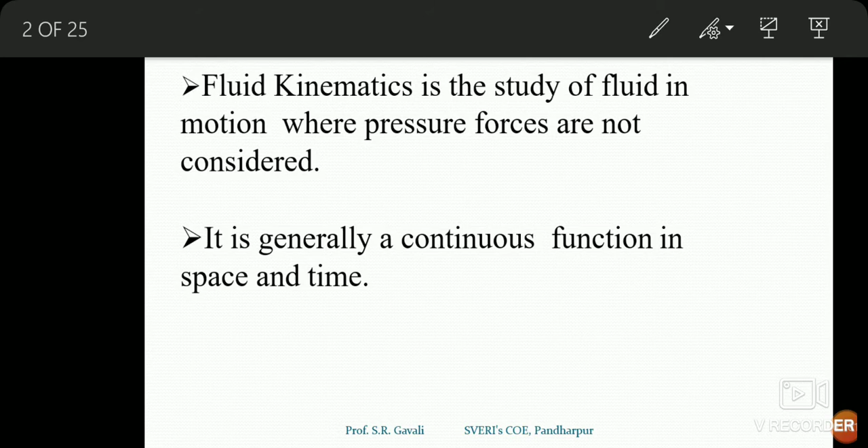To describe the methods of fluid flow, there are two types of methods: one is the Lagrangian method and one is the Eulerian method. These two methods are described by the fluid particle motion. In this method we analyze the fluid flow and find the changes in terms of velocity and acceleration of the fluid flow.

The first method is the Lagrangian method. The scientist Lagrange described this method, hence the name Lagrangian method. In this method, a single fluid particle is considered and its motion is analyzed. In the Eulerian method, one point is selected, and how the fluid flow is flowing at that point is analyzed.

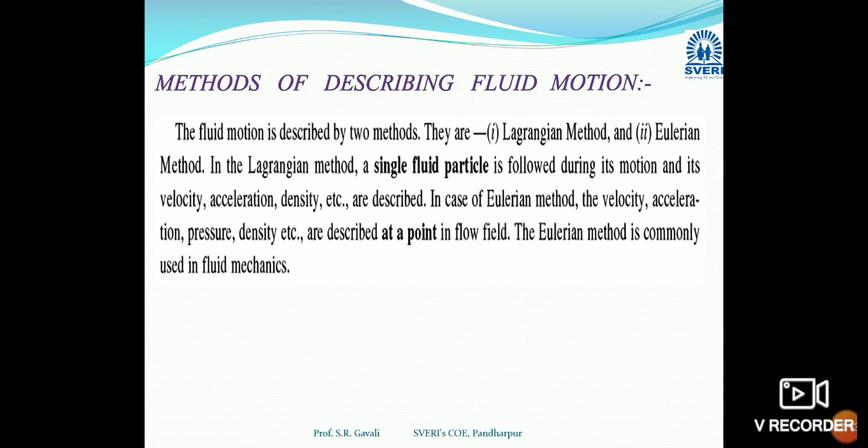So the first method is the Lagrangian method. This method defines mass, velocity, acceleration, pressure, all properties of fluid as a function of time. We consider one single fluid particle and track its motion.

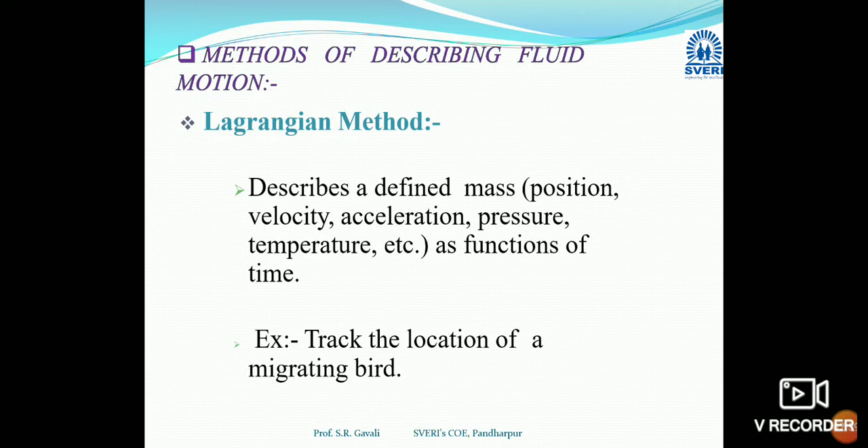For example, if birds are migrating from one place to another, their analysis requires tracking the motion of a single bird - calculating its velocity, speed, and acceleration change. How one bird migrates from one place to another - that is nothing but the Lagrangian method.

Another method is the Eulerian method, which describes the fluid flow. Here velocity, acceleration, pressure, temperature are properties of not only time but also of space. In the Lagrangian method, they are properties that are functions of only time.

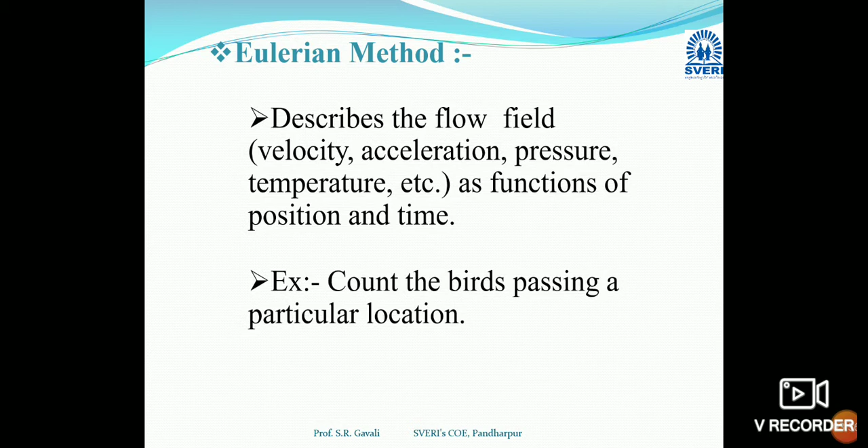If a crowd of birds is flowing, counting the birds passing through one particular point or space - how much of the bird group is flowing - that is the Eulerian method. In the Lagrangian method, the observer has to move with the particle, but in the Eulerian method, the observer stays at one particular point and analyzes the fluid flow.

In fluid flow motion, since in kinematics we describe only velocity and acceleration, an important part is the types of fluid flow according to the change in velocity or the type of velocity. There are many types of fluid flow.

I will highlight them: first is steady and unsteady flow, then uniform and non-uniform flow, laminar and turbulent flow, compressible and incompressible flow, rotational and irrotational flow, and one dimensional, two dimensional, and three dimensional flow.

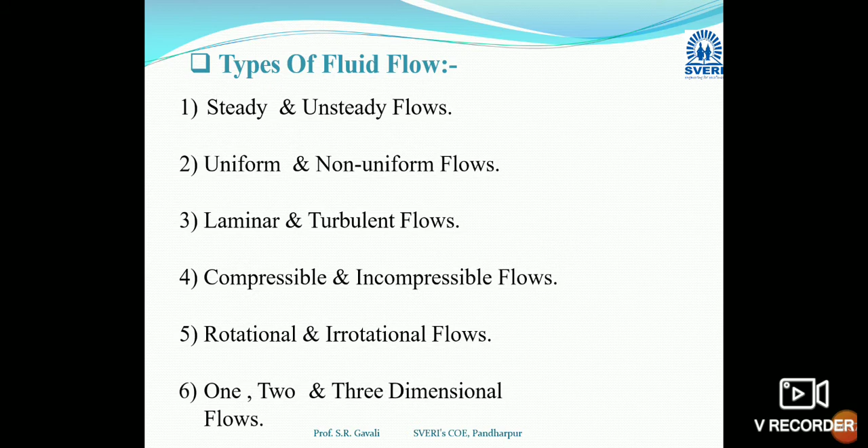Now we'll discuss these types of flows one by one. Steady flow is that kind of flow where the fluid characteristics like velocity, pressure, density, etc. do not change with respect to time - they remain constant with respect to time. This kind of flow is called steady flow.

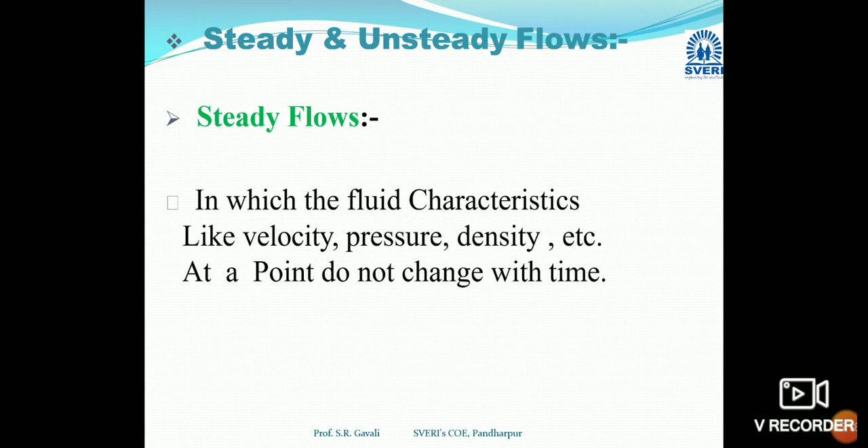For example, if we take the discharge from a tank whose water level is kept constant, every time we get the same discharge - that is called steady flow.

Then there's unsteady flow, where fluid properties like velocity, pressure, density do change with respect to time - they are not remaining constant. For example, if we take the discharge of water through a tank whose level is not maintained constant, as the head goes on decreasing, the level goes on decreasing, and the discharge automatically decreases.

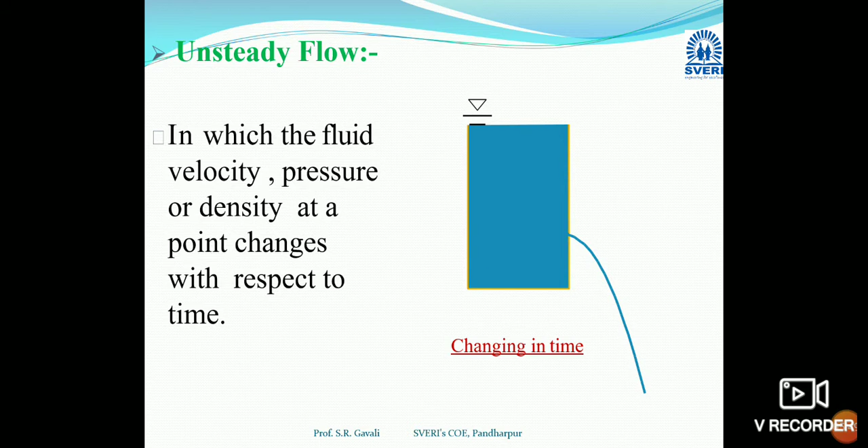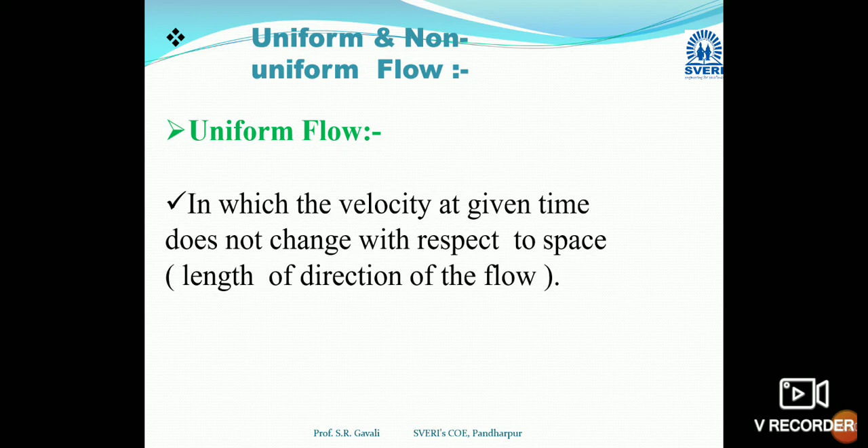Then uniform and non-uniform flow. Uniform flow is a function of space, in which the velocity at a given time does not change with respect to space, length, and direction of flow. So for every point in the fluid flow, the velocity is remaining constant, it does not change with respect to space at a given instant of time. That type of flow is called uniform flow. For example, the flow of fluid in a uniform diameter pipe is an example of uniform flow.

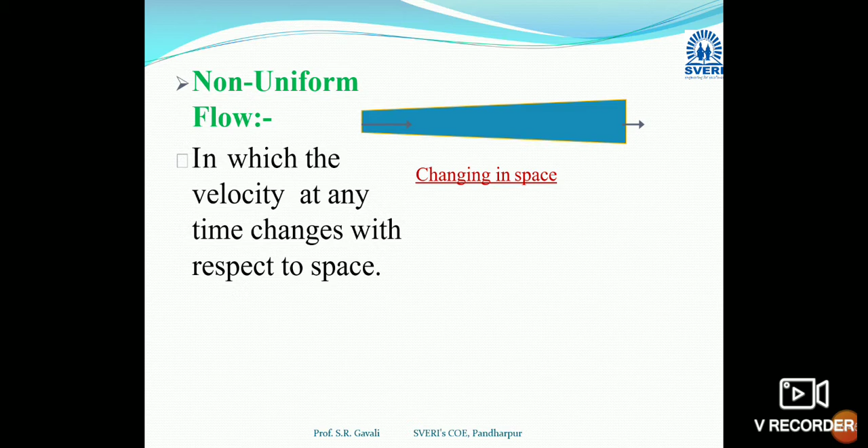Then non-uniform flow, opposite to uniform flow, in which the fluid velocity changes with respect to space at a given time. Here a non-uniform tapered pipe is shown. This pipe is tapered, so this is an example of non-uniform flow. Flow of water or fluid in a non-uniform pipe is an example of non-uniform flow.

Then another important type is laminar flow and turbulent flow. Laminar flow is the flow in which the fluid particles move in a streamlined manner, parallel to each other. These fluid particle layers will not cross with each other, and the velocity of laminar flow is always very low, so laminar flow occurs at very low velocity.

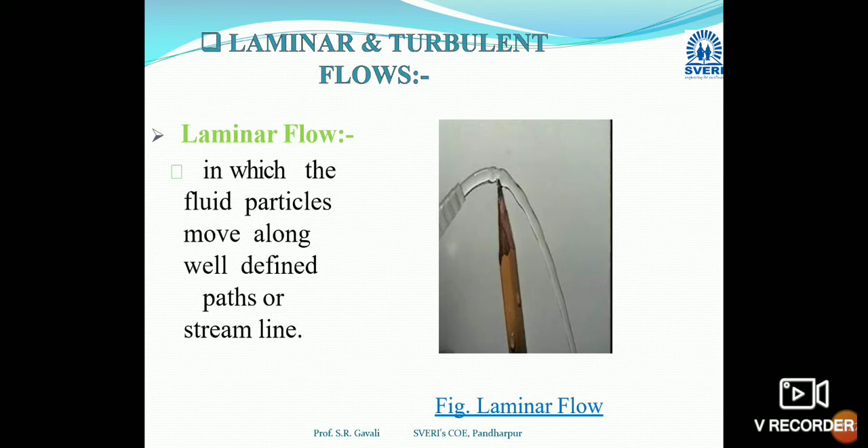Then turbulent flow, in this type of flow the fluid particles move randomly and are not in a streamlined manner. The fluid particles mix with each other and flow in a zigzag way. There is efficient mixing of the fluid flow, and the velocity is much more for this flow, and the fluid particles get mixed. Generally, the flow of water through a municipal corporation pipeline is turbulent, or whatever fluid flows in a pipe for agricultural purposes is also turbulent flow.

The turbulent flow occurs at very high velocity, and for this there is a number called Reynolds number. Reynolds number is less than 2000 for laminar flow, and more than 4000 for turbulent flow.

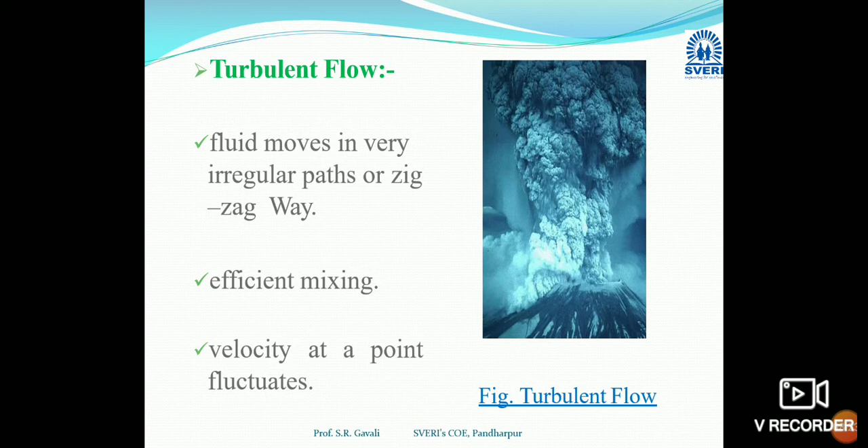Then another type of flow is compressible flow and incompressible flow. Compressible flow is that type of flow in which the density of the fluid changes point to point. That type of flow is called compressible flow. So all gases, when flowing through a pipe, or air, is considered as compressible.

While in incompressible flow, the density of the fluid does not change point to point, it remains constant with respect to space or at different locations. So density of the fluid is constant for incompressible flow. All liquids and water flowing through a pipe are considered incompressible flow.

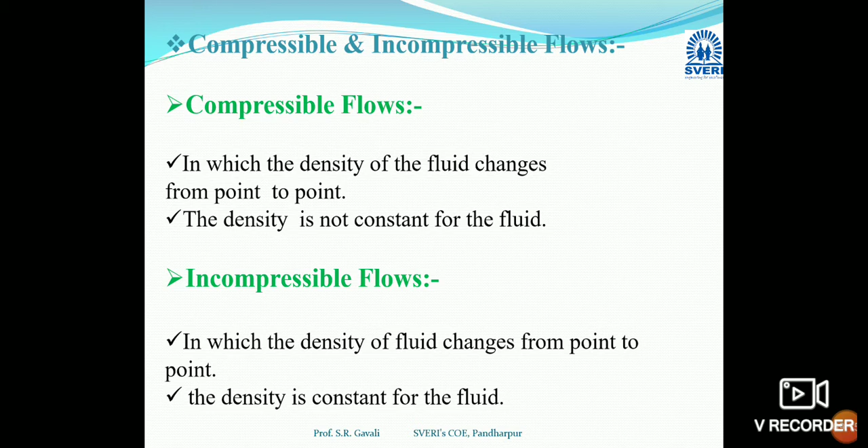Then rotational flow is a good example. Rotational flow means the fluid particles, while flowing, rotate about their own mass centers. That type of flow is called rotational flow. So the fluid particle rotates while flowing, but at the same time rotates about its own mass center. For example, Earth moves around the sun, and it also moves while moving around the sun - it revolves around its own mass center per day, which we call a day period. Similarly, fluid particle example is a whirlpool in water.

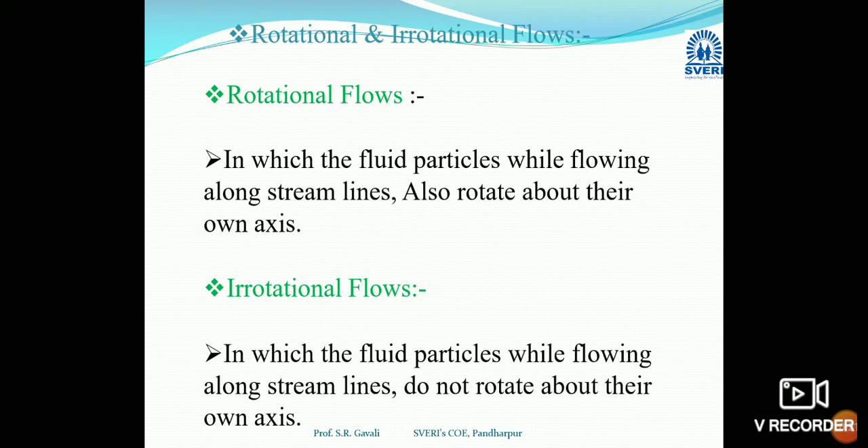Then irrotational flow - the fluid particle, while flowing along a streamline, does not rotate about its own mass center. For example, flow at a drain hole, like a wash basin drain hole. That flow, when water drains in the vertical downward direction, flows only in that direct downward direction - it will not move about its own mass center. So that is called irrotational flow.

Then one dimensional flow, two dimensional flow, and three dimensional flow. One dimensional flow is that type of flow in which the velocity is a function of time and only one space coordinate. That type of flow is called one dimensional flow. For example, velocity flow of a fluid in a horizontal pipe, considered only along its length.

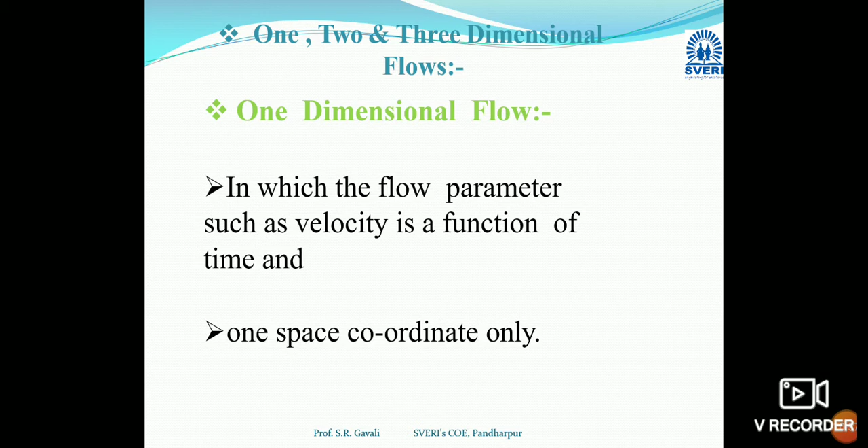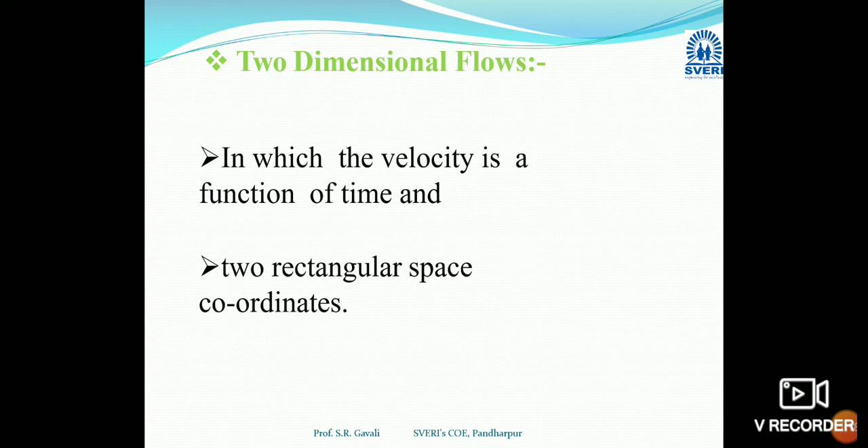Two-dimensional flow is the type of flow in which velocity is a function of time and two space coordinates. For example, the flow of a river considered for its length and width, how much it is going and how much width that particular water is covering, that type of flow is called two-dimensional flow.

Three-dimensional flow is where velocity is a function of time and three space coordinates. For example, the flow of a river considered for its travel length, width, and depth. That is called three-dimensional flow.

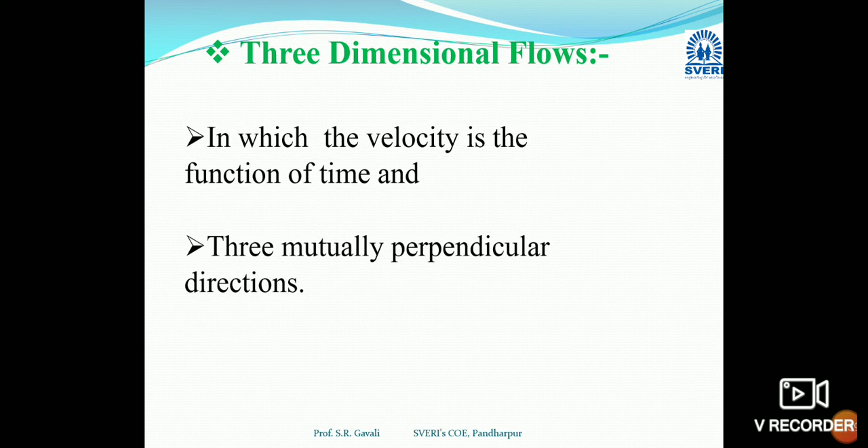Then we have to graphically visualize the flow. To analyze the flow, our first method was a graphical method. Flow visualization is the visual examination of flow field features. For this, numerous methods are there, and we have to plot streamlines, path lines, and streak lines of the flow.

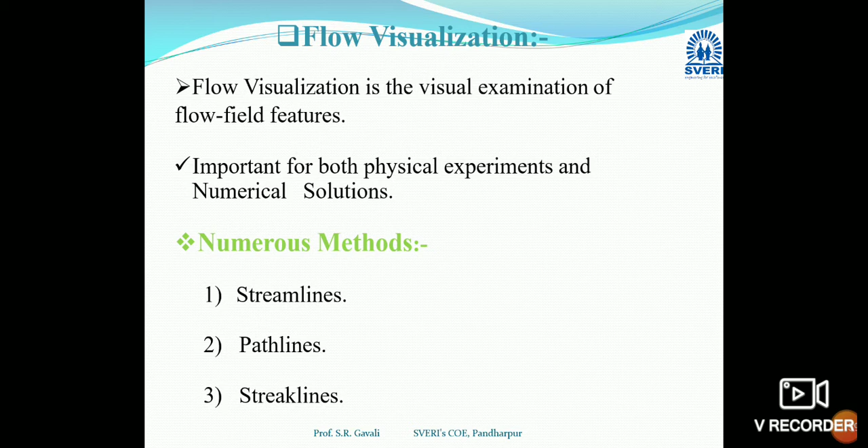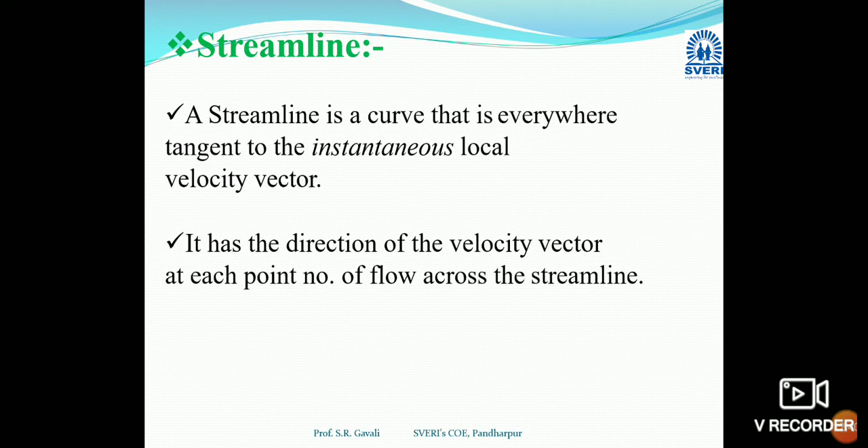One important concept in flow visualization is the streamline. What is a streamline? It is a curve that is everywhere tangent to the instantaneous local velocity vector. A vector always gives direction and magnitude, so the tangential component to the streamline always gives the velocity component. By plotting streamlines and their tangential components, we can get the velocity vector, that is, the direction and magnitude of the velocity.

So here one streamline is there, and the tangential component here gives the velocity vector v bar. So this is going to be the streamline.

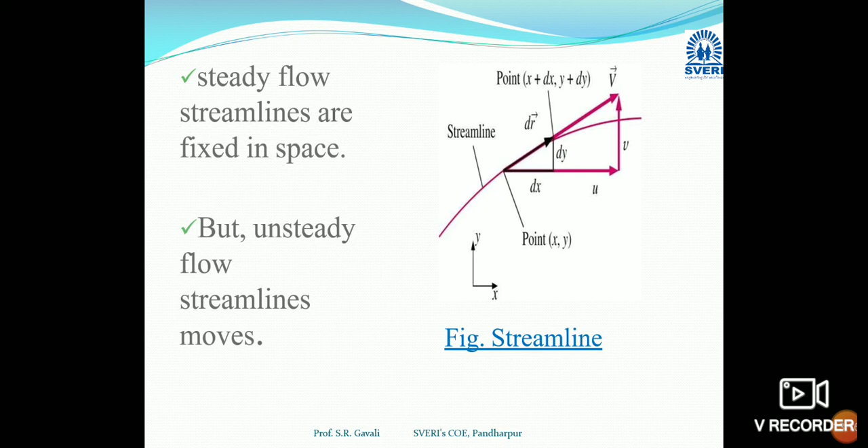For steady flow, the streamline is fixed in space. But for unsteady flow, the streamline moves, meaning the streamlines have different fluid patterns at different points.

Then there is the path line. When a fluid is flowing from one place to another, the fluid particles move from one place to another, traveling along this path. The path line is the actual path traveled by the fluid particle over a period of time. This path may be straight or zigzag, and path lines may intersect with each other. So the path line is nothing but the path traced by the fluid particles over a period of motion.

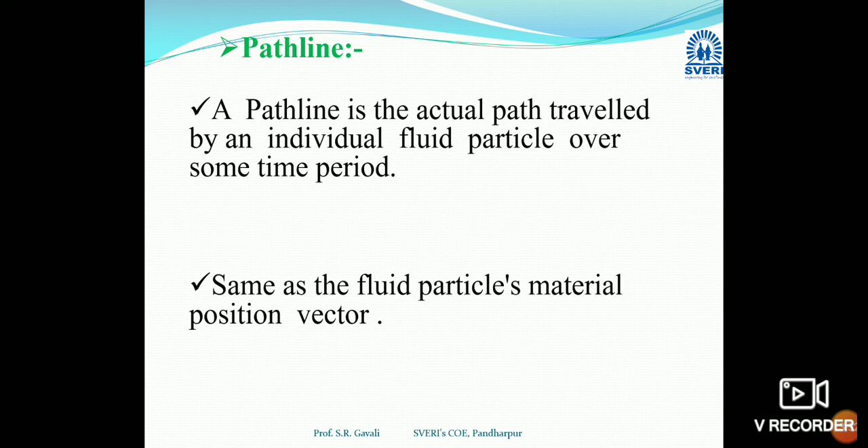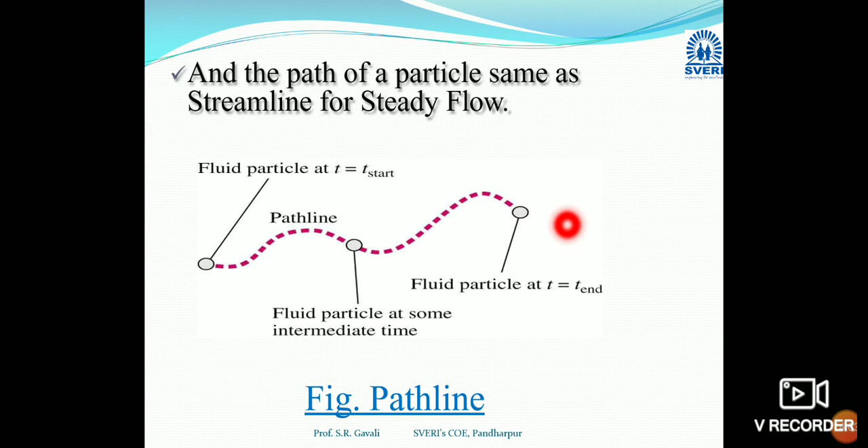So this is going to be the path line, in a zigzag way. It may be zigzag, or one path line may intersect with another path line.

Then another concept is the streak line. A streak line is like a streamline, but for experimentation purposes, we inject some colorful solution or dye into the fluid flow to analyze it. The flow lines we get when we inject the dye or colorful solution in the fluid are called streak lines, and during experimentation they pass through one fixed point. That is called a streak line.

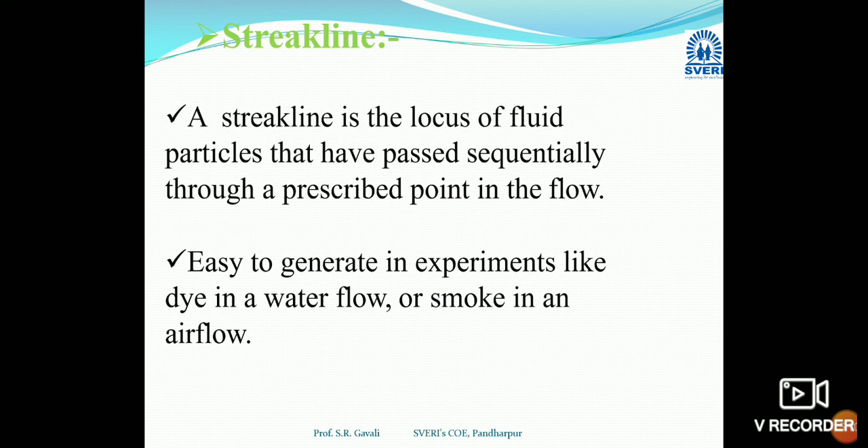For example, take a scented stick. If we ignite that stick, the gas flows in the atmosphere, and its flow lines are observed coming out from one fixed point — that is called a streak line. A tracer is injected continuously into the flow, and this fixed point is where it originates.

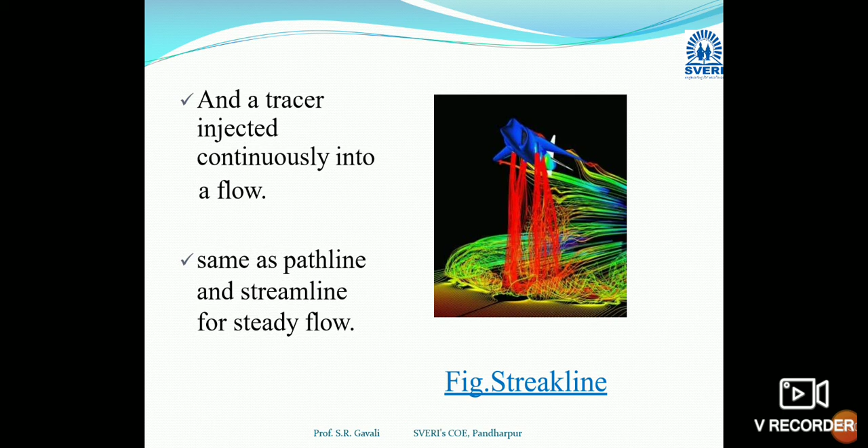Streamlines, streak lines, and path lines are the same for steady flow. These three lines are identical for steady flow, but for unsteady flow, the streamlines, path lines, and streak lines are not identical. So in this chapter, we have covered the flow visualization methods, flow analysis methods, types of flow, and also gone through what is meant by kinematics.